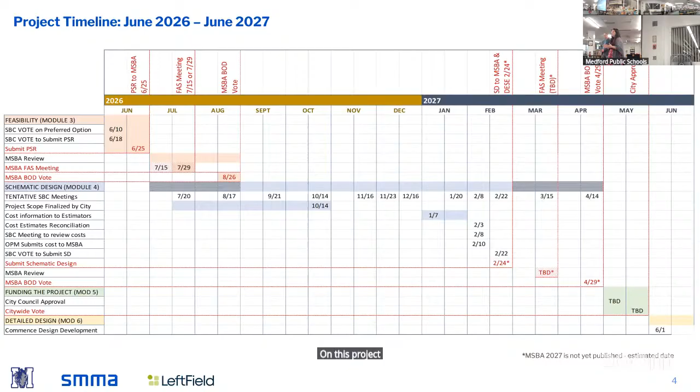So we submit SD in February 2027. From there, there's another MSBA Board of Directors approval in April, end of April 2027, and that will approve the project scope and budget. We will know at that point what the MSBA's grant is officially on this project and what their participation will be versus the district share.

Moving from there, in May of 2027, that is when we are targeting the local approvals for the project. Once the project is approved locally through a vote, we move into design development, and from there, I think it depends on what option is selected for the timeline of when a school would open.

So that's enough information probably on schedule for now, and we'll hand it back to Matt to talk more about the exciting stuff.

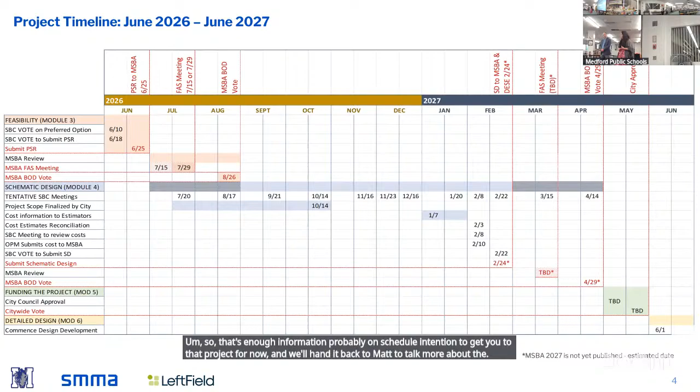I think it's all exciting. The schedule is exciting. Deed restriction is exciting as well. So we did talk at the last community meeting about the deed restriction. This was the agreement back in 1967 between DCR and the city of Medford.

When the existing high school building was built, a section of Edgerly Field as well as the football practice field had a deed restriction placed on it, saying that the only things that can be developed there are either for recreational uses or for access roads to feed those recreational uses. So that was something that came to light.

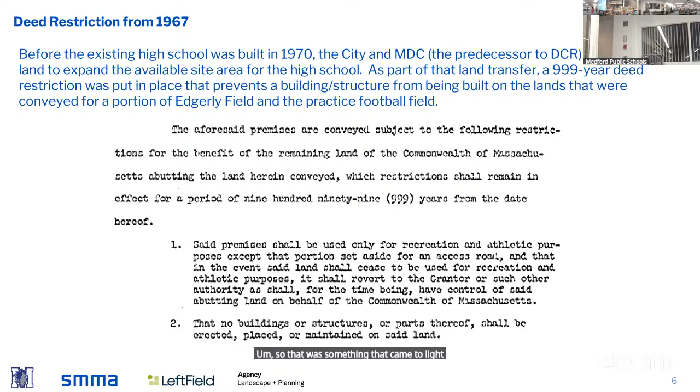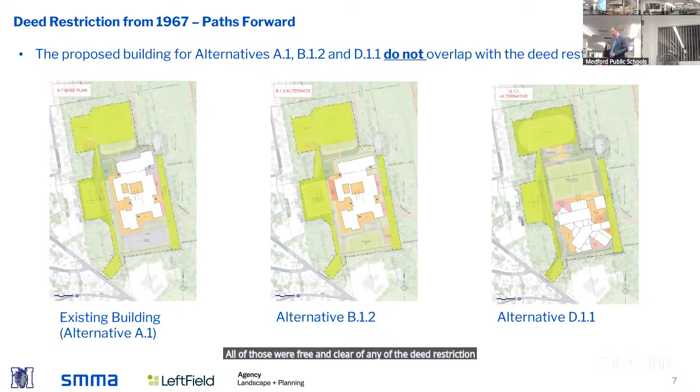The three alternatives you see here are the A.1 code upgrade option, the B.1.2 addition renovation option which keeps the majority of the existing building, and the D1.1 option, which is new construction primarily on the southern parking lot with a little on the existing building. All of those were free and clear of any deed restriction areas, so we can proceed with considering those as we initially had.

Alternatives C2.2, 3.4, and D2.1 all had some amount of their building massing overlapping on that deed restricted area. What we've done moving forward, and what the building committee voted to approve, was revising C2.2 and 3.4 to avoid the deed restricted area, keeping the spirit and design intent of each, but shifting around the volumes you'll see in a moment.

D2.1, there was no way to conceive of that option outside the deed restriction, because that option was building on Edgerly Field, and since the majority of Edgerly Field had the deed restriction, it sort of negated it. That was voted on at the last, or maybe two building committee meetings ago. There was a decision to move forward with C2.2A and C3.4A, which are the evolutions of those two, and to remove D2.1 from consideration.

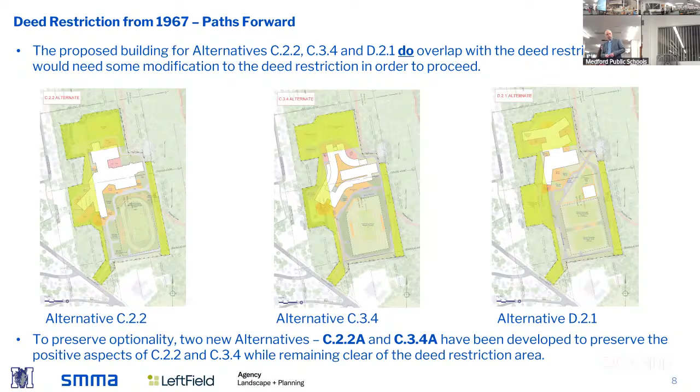I think it just takes a little while to come up. Nope, it didn't. So this is just a quick explanation.

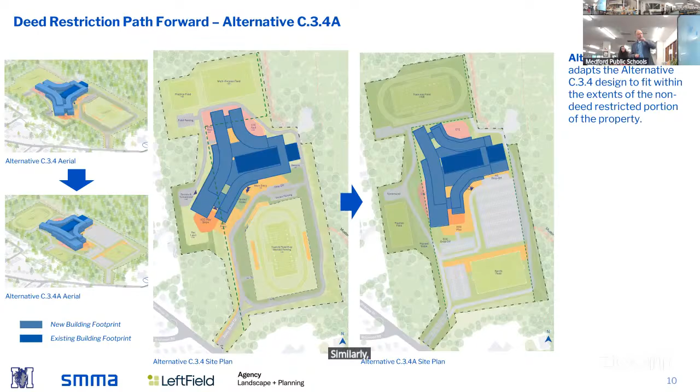There's a three-dimensional view here as well, showing that progression from an aerial overhead view from C2.2 to C2.2A. Similarly, C3.4 evolving to C3.4A. Again, you can see the deed restriction line coming through, and you can see how the intent of the building and the genesis behind the massing remains intact.

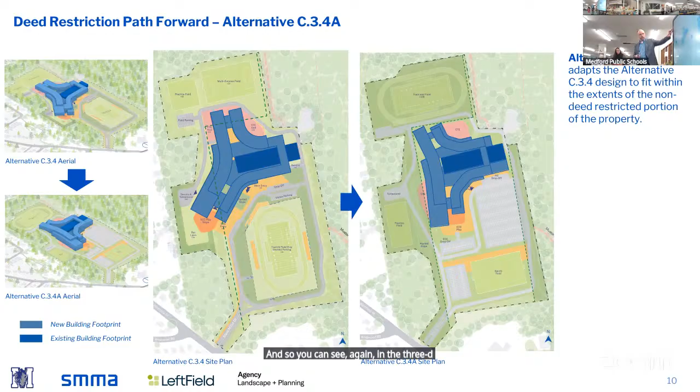Both of these options preserve the existing gymnasium as well as the existing pool, renovating those and building around them in different ways. You can see again in the three-dimensional view how we're evolving the massing going forward, and we'll get into some more detail there. So that was the deed restriction input into our design process.

The other input into the design process has actually come from the MSBA. In the feasibility study hierarchy, we complete the preliminary design program, which is a PDP phase report. We submitted that to the MSBA, they reviewed it, and got back to us with some comments.

One of their comments was that they wanted to see a high school-only option developed for one particular design. They didn't say we need to do it for all the designs—they just wanted it run out as an example, to understand the cost implications of not doing anything in this building besides high school grade 9 to 12 program elements.

There's a lot of other things here at the high school. There are some things being considered to be brought here, but as an evaluation point, the MSBA asked us to do this. We did have conversations with them about why they were asking for this particular topic, and I think Jenny explained it at the building committee meeting we had on Monday of this week—that it wasn't that they were telling Medford we cannot have any of these other non-high school programs in the building.

What they want to do is make sure it's absolutely clear as to the cost of those non-high-school related programs. So by taking all of them out, we're going to look at the costs, but we're also drawing floor plans and looking at massing so we can see the various implications of pulling those pieces out of the building. We've added that in as another alternative for consideration.

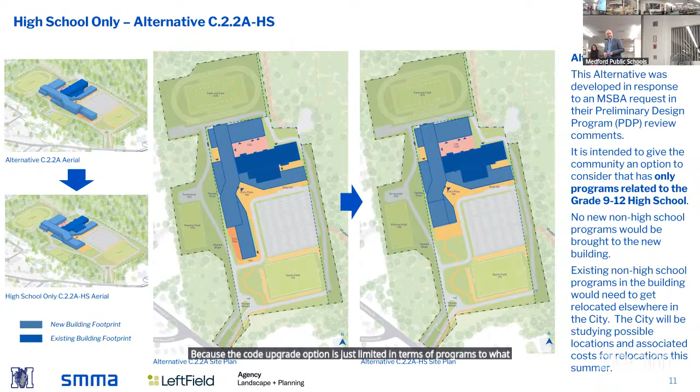So that's how we got to where we are today. I'm now just going to run through the 6 different options so you can see on a level playing field where they are, and then I'm happy to take some questions afterwards. I saw a question back there, but I think if I run through some of this I may answer some questions. It's good to have the full suite of information before we dive in.

So graphically, comparatively, all 6 alternatives currently under consideration are shown here. So again, code upgrade, our addition renovation that preserves the majority of the building, builds vertically from it and replaces the A wing. C 2.2A now, and C 2.2A high school only, keeping the gymnasium, renovating the pool. What's depicted also in C 2.2A is the renovation of the fitness center, the gymnastics gym, and some of those high-bay spaces that are larger from an alternative PE perspective.

That's shown here. I wouldn't say that's necessarily off the table right now for C 3.4A, but it's not shown graphically—that's why the dark blue is slightly different here than in that particular option. And then lastly, we have D 1.1, which is our all-new-construction option that's still preserved.

The costs for these were also presented at some recent building committee meetings. What's outlined here is the variety of costs for, again, 6 options. It's slightly different in terms of what's running across the top, and I'll try to explain why. There are familiar numbers as you go across the top though, in terms of A.1, the code upgrade option, B.1.2, C 2.2A, 3.4A, D.1, and then there's a D.1 NP at the end.

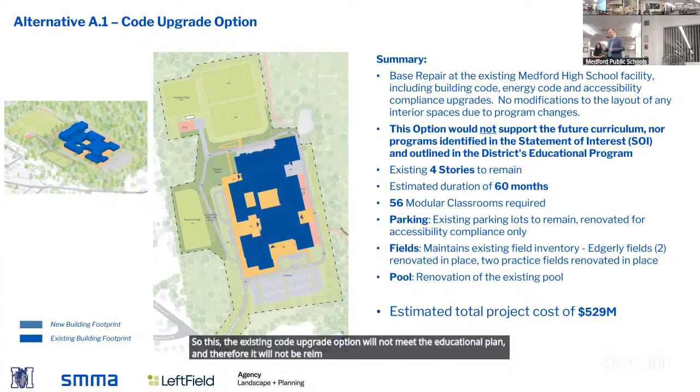So the existing code upgrade option will not meet the educational plan, and therefore it will not be reimbursable at all from the state. We don't have too much information on the code upgrade option - we tend to try not to show existing school plans in public meetings, even though there's been a request previously, just from a safety perspective.

But we did want to give a sense of how this is phased, so people can understand the amount of time these options take and how we'd work through renovating, since we do need to study it. In the first year, starting potentially next summer, we may be doing early work on the site to enable construction of the project. That may include things like drilling geothermal wells, putting in some utilities, and if there are temporary modulars, we'll work on those.

The next year, summer 2028, is when construction would begin in earnest, and we would start towards the northern end of the building.

That includes renovation of the gymnasium, the pool, as well as the C wing. We're starting up here because the central mechanical room for the building is right up there, so we need to replace that and then work our way and feed that into the rest of the building as we move to the south.

The second phase would involve the vocational wings, and the third phase would involve the central B wing as well as the auditorium, the A wing. Where we see this M number here, these are modular classrooms that would have to be brought to the site and used as temporary instructional environments during the course of those phases.

There are 56 of them, primarily because when we take down the C wing or the B wing, that's about how many classrooms we have to replicate for either of those phases. So that's where that number comes from. This shows how we move from the existing building to a fully renovated version of this building, basically fixing what's here today.

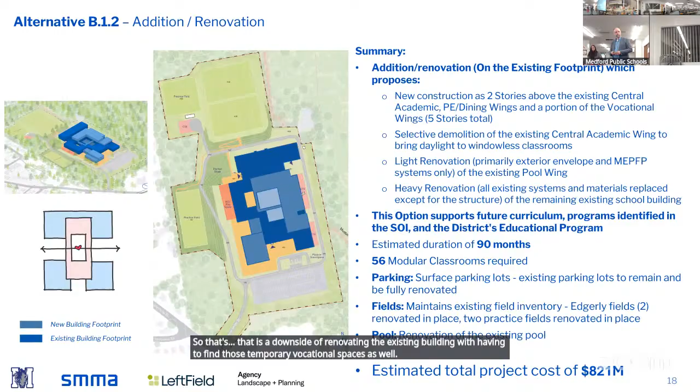We do have floor plans of the existing options. I'm not going to go through all the detail of these, because I have done it before. If people have questions, I am more than happy to circle back to them, because there is a lot of thought and time that's been put into organizing these plans so that each one would be a wonderful school environment at the end of the day. We don't want to show anything to the community that we wouldn't be happy with as a design product.

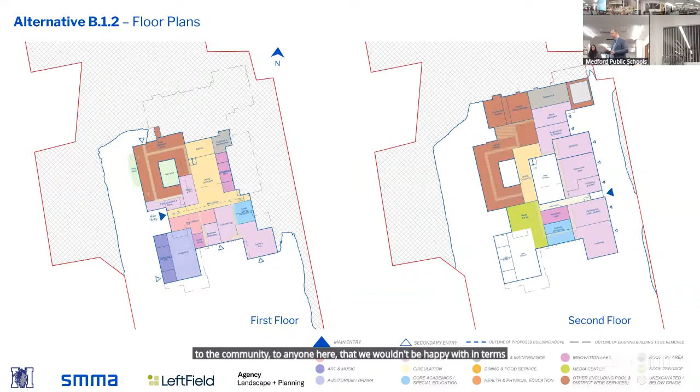They've all been thought through in terms of programmatic adjacencies that we heard when meeting with the educators, trying to understand what the building is about, but also trying to create a logical, connective set of spaces so it feels like a more connected community when high school students enter, and when all the other program elements at the high school are brought to this building or reconfigured within it.

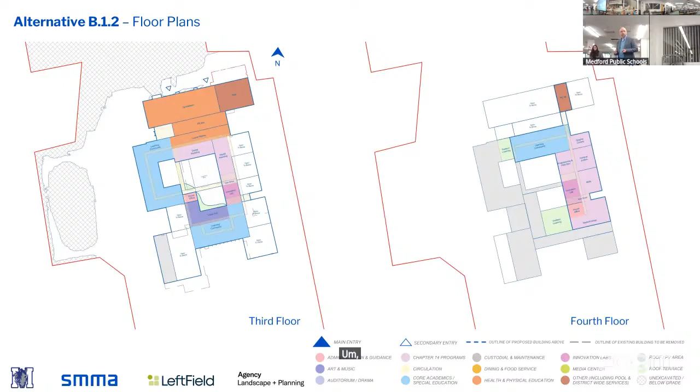So again, 5 floors here with this existing building, with the 2 added stories going above the primarily 3-story building that we have today. An aerial image showing some of those programmatic relationships.

Second aerial. I'll point out, as we're looking at both the building and the rest of the site context — and I may steal all of Laura's thunder and not let her get a word in edgewise, but stop me if I'm missing something.

I did want to point out that for all the previous options, we were showing a field located over a parking garage as our primary concept. As we shifted from our initial preliminary feasibility study phase to this phase, we really shifted the thinking so that our baseline assumption is all surface parking and surface fields, no elevated field above a parking area. We do still have numbers for that alternative, and I'll show you the numbers in a minute for each option.

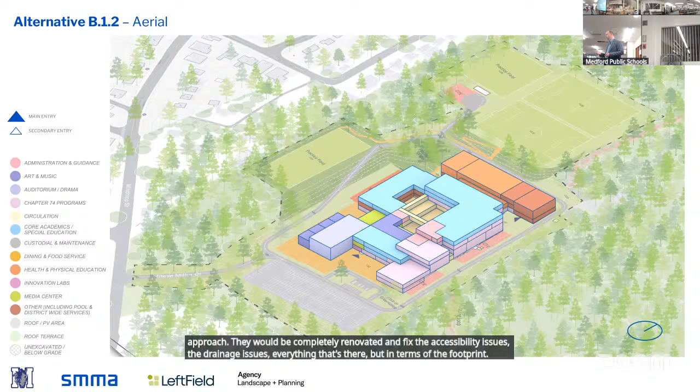But what you'll see right now, for instance in B1.2, and also in A.1, basically recreates the existing parking areas on site as the parking approach. They would be completely renovated — we'd fix the accessibility issues, the drainage issues, everything that's there. But in terms of the footprint, it's going to look very much like it does today, and that means the field inventory will also look much like it is today: renovated versions of the football practice field, Edgerly fields, and the practice field adjacent to Edgerly fields.

Do you want to talk about this one, Mark? I think it's great. Does it cover the site circulation?

Sure. One of the main differences is all the options will have 360-degree access around the building. We heard from so many people that circulation is kind of a nightmare at times, and we heard from first responders that this is a concern of theirs. So there will be different roads and loops for buses, car drop-off, and of course emergency egress. It's a little more difficult to change the grade with the majority of the existing buildings staying as is, but we found a way to make that connection happen on the other side of the school.

I'll also make a plug for the field-over-parking option, which would basically give a whole other field on site, and all the parking would be less visible and underneath. It does add to cost.

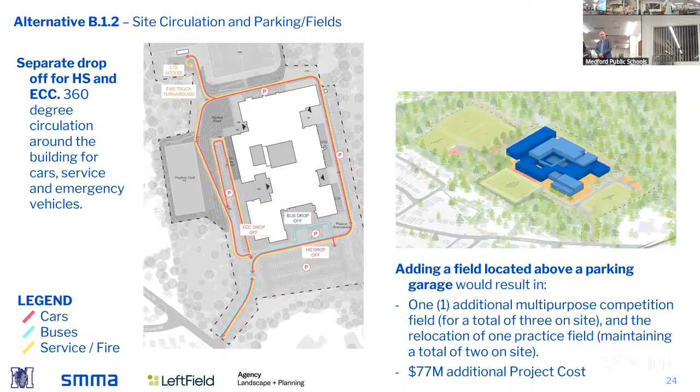I won't take too much time on the phasing diagram for this, because the concept is exactly the same as the A.1 option. Really, the only difference is in the duration of the phases, particularly when we're building new construction above existing buildings. It slows down the process compared to just renovating the inside of the building, because you can just start there and go through. We have to make sure the rest of the building, where students are learning and teachers are teaching adjacent to that construction area, stays safe. That priority on safety, and the nuance of having to build through, matters. This is built on top of the steel frame portions of the building, which is more viable than trying to build on top of the concrete frame portion. So it's still a best case scenario, but it's lengthy, and the time is increased considerably from the A.1 option because of that.

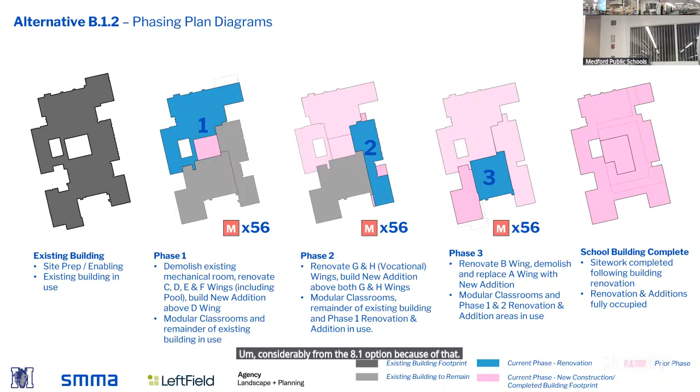All right, our C2.2A option — this is again the revision to the C2.2 option based on the deed restriction response. The total height of this building is 6 stories. That first story is really just a portion of the lowest, most southern extreme wing of the building, where the early education center would be located. So the portion of the building that high school students experience is primarily a 5-story building, but to keep everything on a level playing field, there are 6 floors, so we're saying 6 stories.

Just some items of note here. Again, the modular classrooms were removed from all the rest of the options in terms of consideration. We heard the feedback during the initial feasibility study phase that they were not desirable. So we've essentially come up with phasing options that avoid the use of the modular classrooms. As we did additional study on the phasing approach, you'll see that the time frame for this overall did increase considerably as well.

And that's really because we have considerable pieces of the building, square footages, areas of the building, in each particular phase. So there's only a certain amount of building you can build in a certain amount of time. So we have to layer those different phases on top of each other.

The C 2.2 option was a little bit shorter in terms of how it could actually be put together. That's because it flared off in this direction, and because the building flared off that way, we could avoid building on top of the C wing and basically build almost the entirety of the new addition in one phase. That greatly reduced the amount of time by removing a phase.

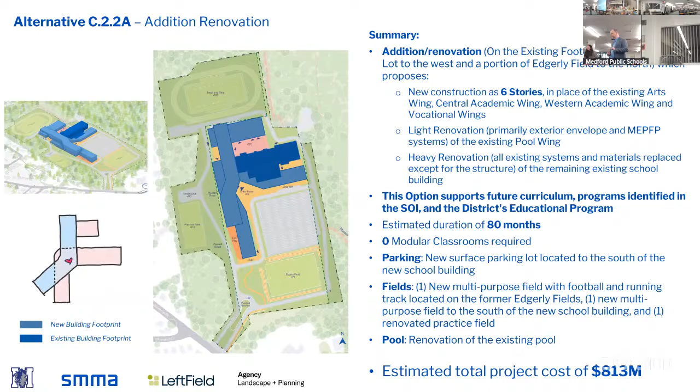All right, floor plans of C 2.2A. Again, I'll point out that first floor I was talking about is just that small piece on the first floor for the early education center. It has a separate entry from the high school, so that we're not commingling where little students are entering the building with where high school students are entering.

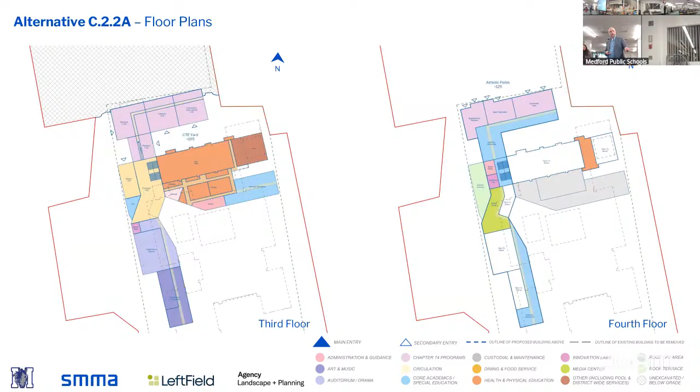We move up. Again, the third floor here is sort of the primary continuous floor all the way through the high school building, and will feel like a completely high school environment. And then we have the fourth floor, fifth floor, and sixth floor above this.

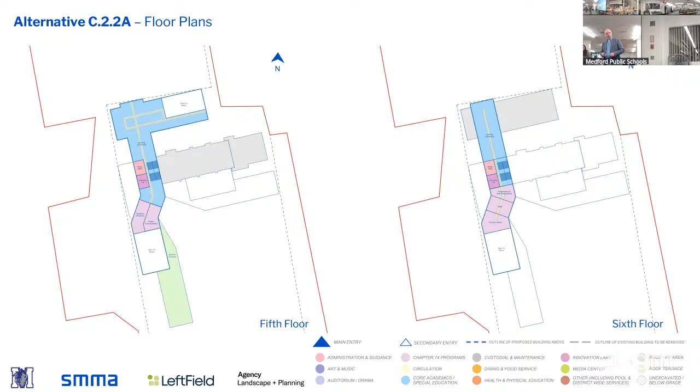The aerial view shows the site components surrounding the building. We're able to fit in both a running track and a football field up at the top where Edgerly Field rests right now. Whether we can have bleachers beyond what's out there now for the soccer and lacrosse fields is something we'll need to discuss with the land counsel to understand what the deed restriction allows. But there is the ability to fit that type of resource on the site where Edgerly is right now.

This would also include the renovation of the football practice field, which could eventually not be football practice once we have a full football field. And then one multi-purpose field as well down towards the southern end of the site, more or less on top of the existing parking lot now.

I would give it, the athletic field is kind of a very last part. So the question is, intuitively, it seems like fields would be the last piece of a construction project going through. I think that's an accurate read in terms of how the site would get developed.

Certainly, if it's a natural grass field, you want some ability for it to sit and rest before it's used. We may have more flexibility with a synthetic turf field in terms of how quickly it can be used and against what it can be used. But I think those are all considerations to be discussed with the construction manager, looking at the city's needs and the district's needs in conjunction, to understand what's viable and what's the preferred path forward.

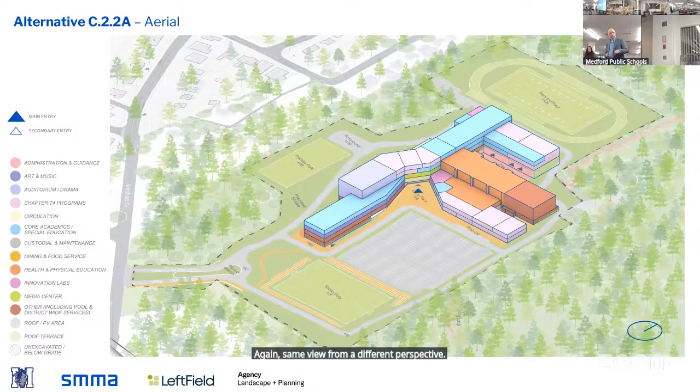Again, same view from a different perspective. The image on the right-hand side is our parking garage with fields on top. In essence, each one of these will add one additional multi-purpose soccer/lacrosse field to the overall field inventory. It slides the parking underneath and raises that one field that was at grade up into a raised, above-parking elevation, if you want to think about it that way.

And as Laura mentioned, all these options now show 360-degree access for first responders, as well as alleviating some challenges of traffic circulating around the site. This option is also starting to explore an improvement to Steve Miller Drive, to alleviate congestion for traffic coming in and out, but also providing amenities for first responders to better address and serve the site. It doesn't create a secondary emergency access anywhere, but it's trying to work with the land we have to create the best scenario possible as we move forward.

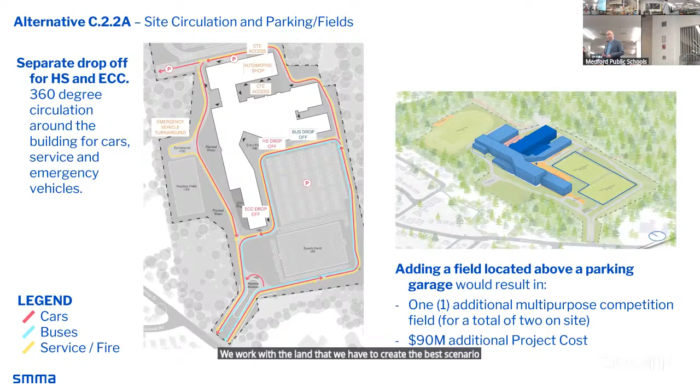The phasing for C 2.2A starts to get into what I was alluding to earlier. This first phase of the building is the one that could be open somewhere between a year and two after we get into the summer of 2028.

Up through here, so renovation of the gym, the pool, new addition. The second phase is where it gets complicated, because we actually have to tear down the C wing and part of the H wing as well to be able to get that to work as it stretches down. The third phase really involves the removal of the existing building that remains, and then the site work is completed after the fact — the fields we were just talking about, parking, that type of thing.

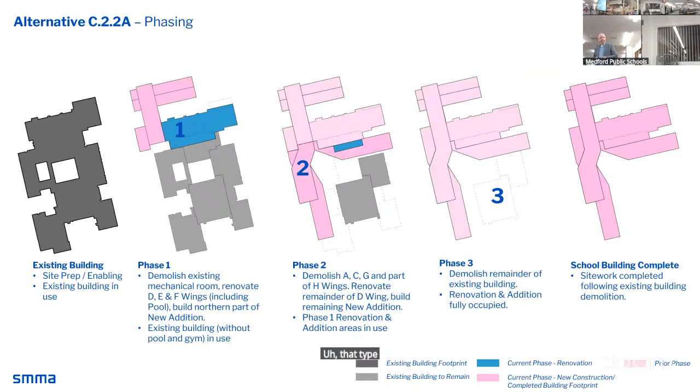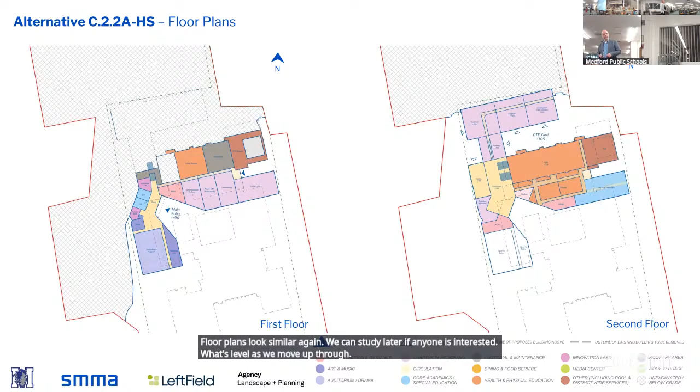Floor plans look similar again. We can study later if anyone is interested what's at each level as we move up through. This will result in a 5-story building though, because we are getting rid of that southern portion, that's where the lowest level was. So even though the building itself is relatively the same on the inside, technically it does change from a 6-story building to a 5-story building.

This is a 3-dimensional view of it from the other direction. And then site circulation, which again is going to look very similar. Part of the reason why we also targeted this area is that we want to think about future expansion as well. We have to plan for the building from an MSBA perspective, but also if down the road those programs that were removed or moved from the high school want to come back, this will be a good location opportunity to fulfill and add that programmatic space on. Same concept in terms of the field over the garage space or over the parking area, same relative cost in terms of this high school only option.

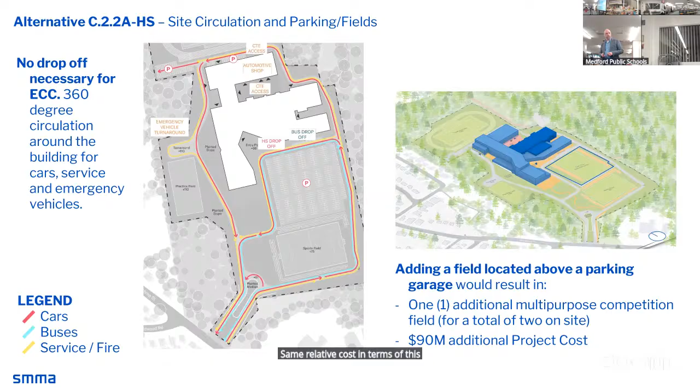In the phasing, this is the same phasing. This is actually the C2.2A graphics that you see here, but you can imagine if we just take away that section towards the bottom, the phasing concept is going to be exactly the same.

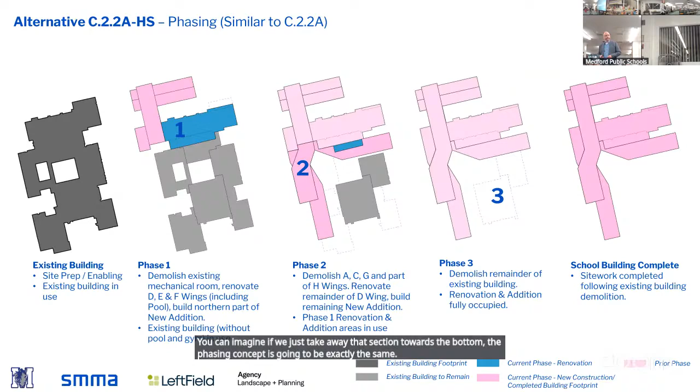C3.4A, so this is our second addition renovation that focuses on saving the gym as well as the pool space. Very similar, I would say overall to C2.2A. Obviously the geometry is different, the way that we're wrapping around the entirety of the existing field house is slightly different. But in terms of what's yielded at the end of the day, because the building is in a similar spot, this is still having consideration for a track and field up on Edgerly Field, renovation of a practice field, as well as one relocated multi-purpose soccer and lacrosse type field.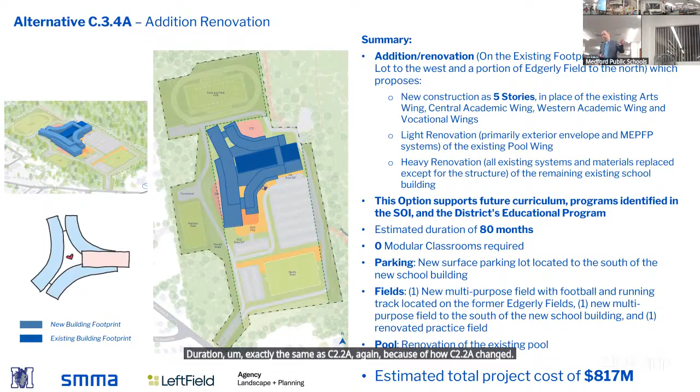Duration, exactly the same as C2.2A, again, because of how C2.2A changed to sort of match and align with the phasing approach to this one. We have our floor plans moving up. This is a 5-story building in its initial configuration as it's represented here. 3-dimensional image of it.

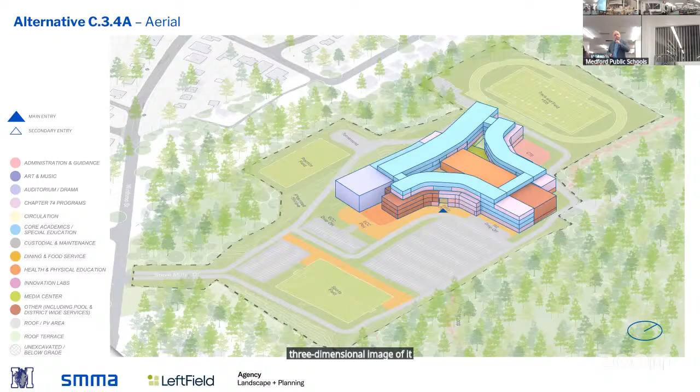And then site circulation, again, very similar in terms of how it navigates. The last time we looked at this, there was a question about whether or not there was this connecting circulation drive that runs through. It was something that was able to be realized in terms of a grading approach to get traffic to circulate through, and so this will provide a shortcut rather than everyone having to circulate around the entirety of the building and back down, which we understand was challenging. This allows for bus traffic, MBTA buses pulling in, drop off at the front of the high school, and then pull back out, so it streamlines that approach.

Our phasing concept here is similar, we're going to be building towards the northern end of the building. This also, just as we go all the way back to the code upgrade option, we want to replace the central heating plant and cooling plant for the building in that first phase, and that's partly why we're building here. But it means that the pool and the gym and then all these associated spaces are the first ones to come online. We then get to demolish the remainder of the building and build the second portion of the addition.

This is something I didn't explain earlier but is worth noting. The reason why we don't have any modular classrooms in this particular option is because everything that we would be demolishing in the second phase, we're going to be building space for up here. So we're essentially creating permanent modular buildings by creating that first phase of construction.

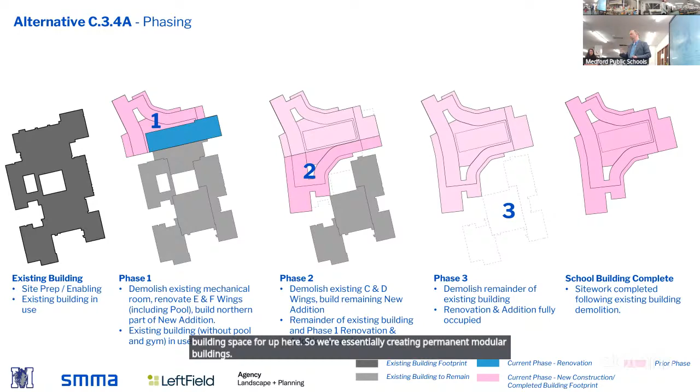And then lastly, we have our D1.1 new construction option, again, to the southern side of the site. We are showing the site configuration here with the surface parking lot adjacent to a multi-purpose field and then track and field up at the top.

I think certainly if people were interested in not having a track and field up at Edgerly, we could still renovate the fields that are up there right now. So you could have two more multi-purpose fields and a practice field up there if that was preferable for whatever reason, that would increase your field inventory on site. This is sort of swapping it out for a different type of resource, but I think one that we've heard is desirable from the overall site perspective, having this type of resource here in terms of allowing athletes not to have to cross the city to Hormel Stadium for that type of competitive environment.

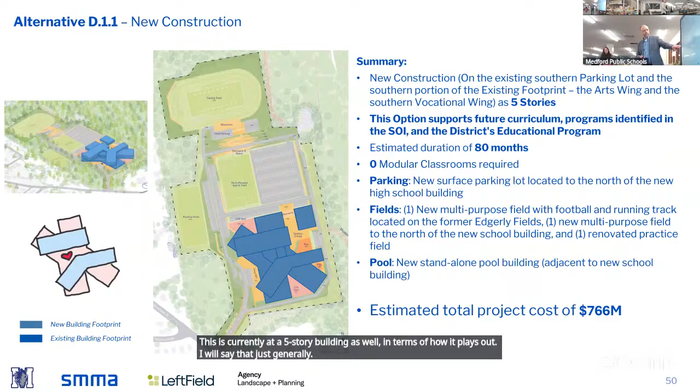Our floor plans moving up through the building. This is currently at a 5-story building as well in terms of how it plays out. Generally, the first floor has a lot of the CTE programs that have access or desire for direct connection to the exterior. Auto technology is one we can't put up in the air. There are other programs that want first floor access too. But the primary high school environment, with the cafeteria and gymnasium, will be up on the 3rd floor. So students would come in and essentially move up to that primary environment, not too dissimilar from the C2.2A or C3.4A options, in terms of how the site works here.

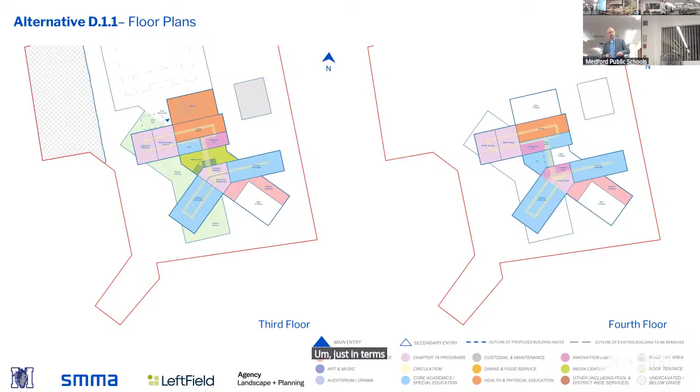The massing on the site, as we talked about before, is responsive to the Steve Miller Drive entry sequence coming in, so it feels like a welcoming environment. We do walk this line with this particular option of being very close to the front of the site, so the building will be very present and visible off of Winthrop Street, versus moving back into the rest of the site. But we also want to make sure this doesn't create a traffic bottleneck right at the entry as we're coming in, so we have to balance site circulation and building massing.

Our other three-dimensional view.

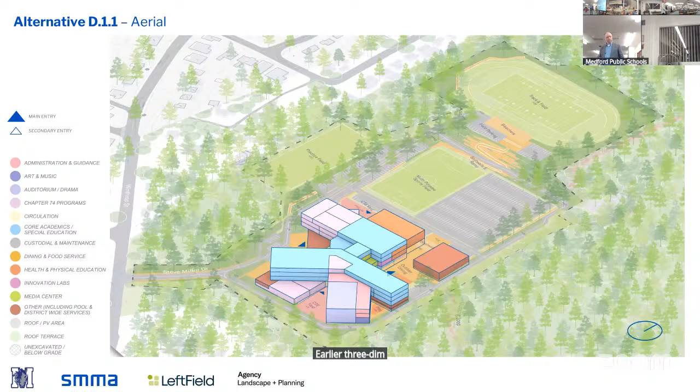So the question again is regarding Edgerly Field in this particular option, whether there's any higher potential for Edgerly Field to come offline immediately, and then the other field, so that it could be used for parking potentially, given the fact that we'll be building on top of the parking lot in the first phase with this option.

It's definitely a possibility. I don't know if it's any higher possibility or probability than any of the others. I'll default back to saying we need to have the CM on board, and then we need to engage in a conversation with the district and the city to understand the priorities. Because we could determine it's more important to have a field on site, and then create parking off site with remote shuttling or something back and forth. We can change parking policies so people can't drive. There's a whole bunch of different options and levers we can push, but we haven't had those conversations yet to know where the priorities are and where we'd end up.

We really do want to have the construction manager on board before we dive into that, because we want their perspective. They're eventually going to be the ones that have to manage the timeline, the schedule, and the cost, and work to whatever expectations and obligations we lay out for them in terms of the site development and the fields.

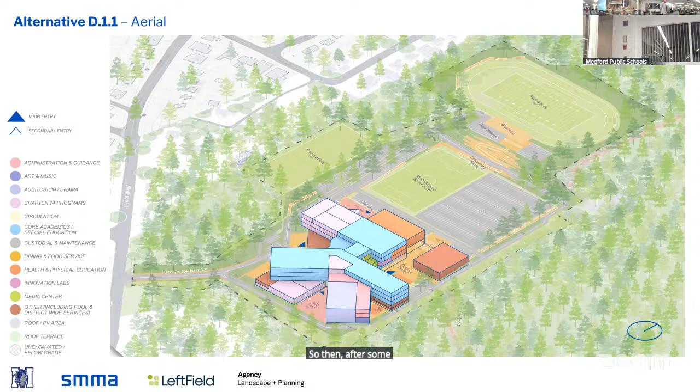So that new construction, you would assume happens while this building is still in use. Then after some time, that building comes online and you start to demo this. That's correct. So the question is, are we envisioning the southern portion of the building being built while the rest of the school is active, with teaching and learning going on? The answer is yes. But it's also going to be yes for any of the other options we're looking at. That's just the reality of deciding to rebuild on this particular site.

Somehow we have to get to a new building, whether it's renovating what's here or building new additions or new construction, while teaching and learning continues. So it will make on-site circulation challenging in terms of how things get modified. We may lose parking, we may lose fields as part of the process until we're all the way done. But it's also going to be a big part of the construction manager's responsibility to make sure site circulation is done in a safe and responsible way, so no one is put in any danger going through this. That is the paramount consideration when building on an occupied site.

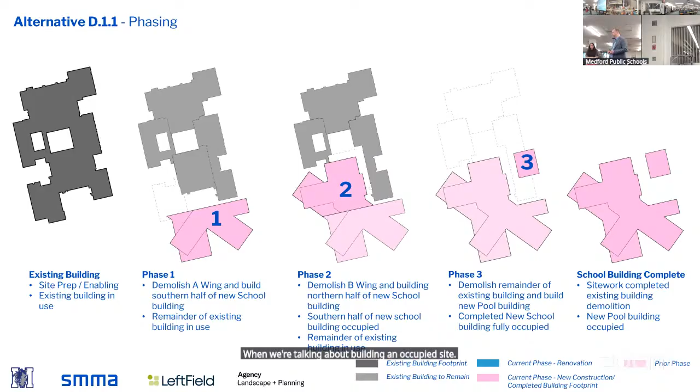All right, so I guess that was technically okay to ask questions because we're sort of at the end anyway.

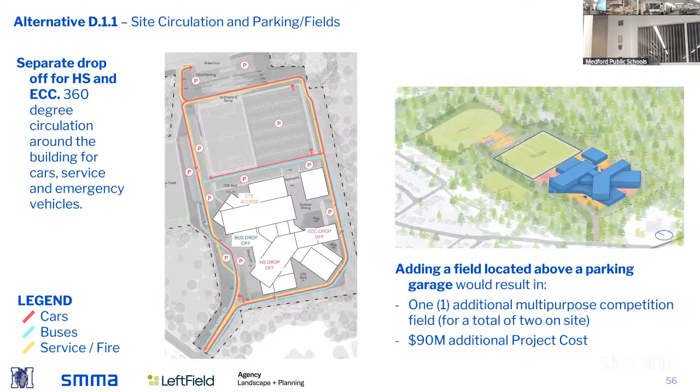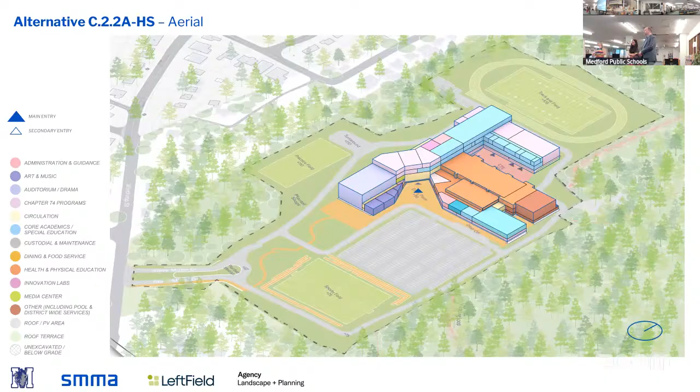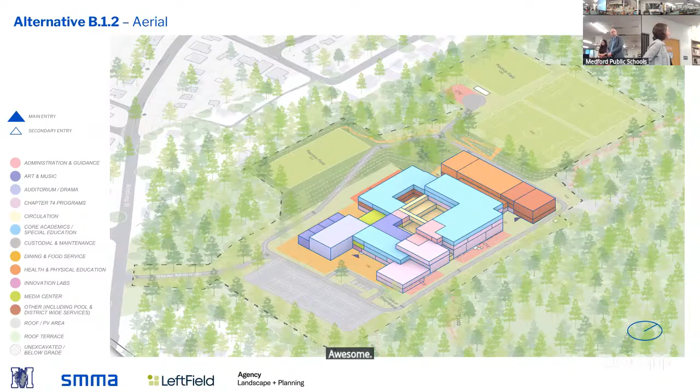Right, yeah, yeah. So I'm going to try to repeat those questions, and you're taxing my memory, so I'm going to try to go all the way back. No, it's fine, it's my issue.

The question was about the removal of the modulars and the cost impact on the project. It was stated that when we take the modulars away, there is a cost reduction because we don't have to pay for them, and that is a true statement. That reality was accounted for in the updated numbers you see here. It's really more impactful than just taking away the modulars, because the modular construction is not reimbursable at all, and it's also categorically ineligible from the MSBA. So that cost, which would be coming fully to Medford, no longer has to be incurred.

The other piece about the modulars is that when we take them away, we basically have to introduce phasing, or extend phasing from what we previously had. So the additional time required, with the construction manager having their staff on site for an additional year or two in some cases, is also accounted for in these numbers in terms of the extended schedule associated with removing them.

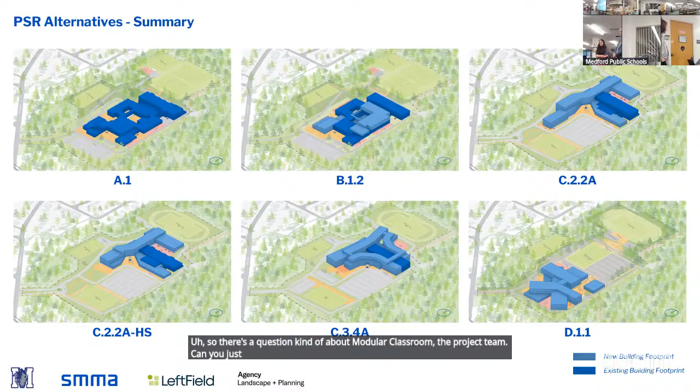So there's a question about the modular classroom project. Can you talk about an experience you've had building a project where there's been that phasing process going on, and how that may have affected education delivery?

Sure. Adjacent to us in Somerville, at Somerville High School, which was even more land poor in terms of the high school project, there were modular classrooms — one bank of about 12 on site. We used that as a shell game location to move teachers and students out into the modular classrooms and then back into areas of the completed building. The timeline got a little complicated because COVID hit right in the middle of the project, but the modular classrooms were used for multiple phases as construction went through.

In terms of impact on education, primarily students were moving, since they were the ones out there — teachers were either out there or not. Students were moving from the existing building to the modular classroom building, sometimes around a construction site to get to another portion of the existing building or a new building and back in. So there was exposure to weather.

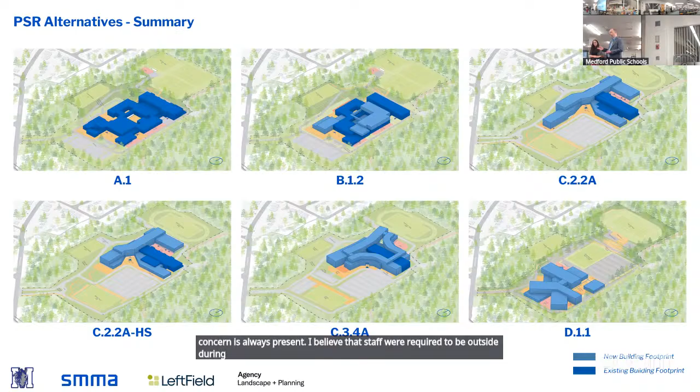There was a little bit of additional time to get outside to move through, but the modular classroom building was placed in pretty close proximity to the existing building. So we try to minimize that and make sure that safety concern is always present. I believe staff were required to be outside during class changes to make sure students weren't walking off in different directions instead of going to different classes. So that was part of the consideration as well.

And then we've got another question, specifically about option D. Can you talk about the impact on athletic facilities and why they'd be smaller in D as opposed to the C options, relative to the gym and things like that?

Sure, so the reason the D option's athletic facilities, the gymnasium, as well as alternative PE spaces like a gymnastics gym or fitness room, would be smaller is because when we have the larger spaces, we're allowed to renovate them through the MSBA program. It's just part of the reality of being in a building with those larger spaces. As part of new construction, they cap the size of the gymnasium we can build as new.

It's not a scenario where we can build larger if Medford is willing to spend their own money to build something bigger. There's actually a hard cap that says if you go over 18,000 square feet on a new construction gymnasium, the MSBA will not participate in your project at all. So it's a hard cap, and that's part of the reason that particular facility would be smaller.

And then for the fitness room and gymnastics gym, if we're building those new versus renovating them, it's a much more challenging thing to get those accepted as larger spaces. Some of that would have to be understood through negotiation discussions back and forth during subsequent submissions of reports to the MSBA, but in a lot of cases those end up needing to be smaller as well.

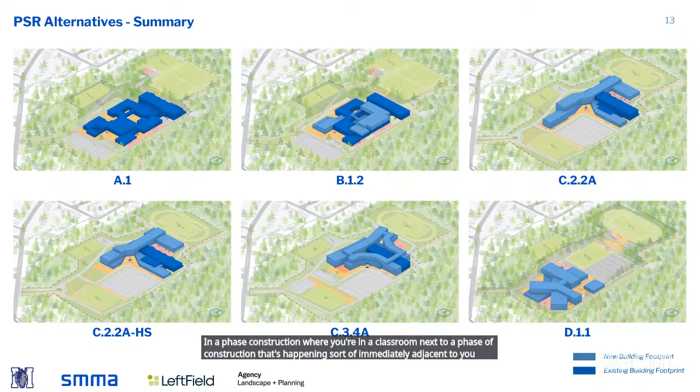Hi everyone, thank you for all this information, it's a lot. My question was actually the one he just asked about the modular classrooms, but the opposite - I'm excited to see less modular classrooms, but I'm curious what the project team's experience is with learning in schools that have gone through phased construction, where you're in a classroom next to a phase of construction happening immediately adjacent to you. Is that better? How has that gone?

I don't know if I'd use the term 'better' necessarily - it's a reality of the process we go through. The things we have to account for are air quality, and there's continuous air quality monitoring done by the construction manager and/or a third-party testing agency during construction, to make sure that wherever dust management barriers are set up, they're doing their job and nothing is permeating through into the rest of the occupied school.

Acoustics is another thing we pay a lot of attention to, making sure that whatever temporary partitions we build, if separating occupied space from space under construction, are designed with acoustics in mind. We don't just put up a single layer of drywall or plywood and expect that to control everything. It's not that we can completely isolate occupied sections from construction, but we need to manage it from an acoustic perspective.

And then we potentially need to work around certain days, like MCAS testing days for instance, which are usually quiet days when certain construction activities will be limited. So there are challenges all the way through, but they're manageable. There has to be a clear line of communication between the construction team, the district, and the school to make sure operations are smooth.

If I could add to that, I think that's one of the benefits of bringing a construction manager on during this design phase, so they can work directly with the district and the school, even before project approval happens, to talk through some of those issues and concerns that would come up on a project happening inside an occupied building.

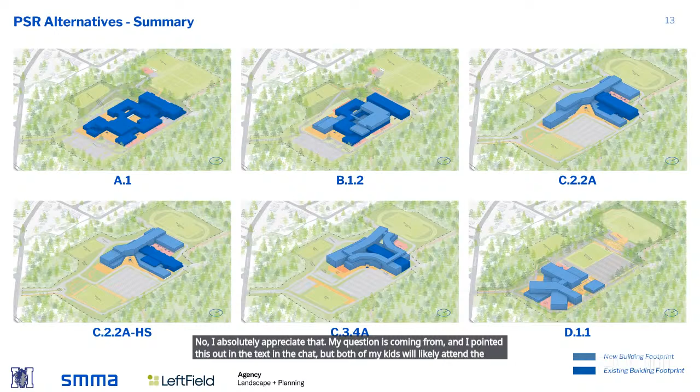No, I absolutely appreciate that. My question is coming from—and I pointed this out in the chat—both of my kids will likely attend the school during construction. I'm just thinking about learning calculus with steel being erected next to me, right? It's a reality, I get it, it has to happen. But I think it's helping me decide between an alteration, renovation, and a new construction option. Does new construction pull those activities apart so that those 80 months of construction are better for the students in the school for those 80 months?

And then just one more comment since I got unmuted. I pointed out in the chat that I'd encourage the building committee to ask for a very simple massing rendering of the building options from Winthrop Street. I think we all acknowledge that getting this project passed is going to require significant community buy-in, and there's an opportunity here to show how it's going to impact Winthrop Street, what it's going to look like, how it's going to feel, when we're thinking about going between the D1 option and any of the others that maintain at-grade facilities at the front of the site. I know D is taller and closer to the road, right above the street. So I'd advocate for the building committee to ask for that in the next week—it's probably something that can be done pretty quickly by super talented 3D modeling teams. But I think it's really important to think about people who aren't going to have kids in this school and how this impacts them.

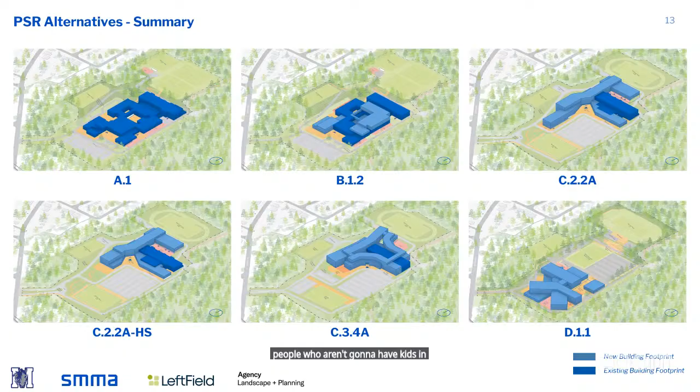I don't think we have to wait for the building committee because you just made the ask, Kara. So the team heard you. Yeah, I think that's something we can share with the building committee, either before or at the June 10th meeting—just part of the visual that's wrapped in here.

I had a question that is maybe best answered by Dr. Galusi, that a resident sent to me and asked that we answer. There are some questions around the need and intended usage of particular spaces. For example, one is about some of the variants we're considering for the auditorium. For those following along, we have options right now for 750, 500, 800, and 1,000 seats. So can you talk a little about where we started, how these options came to be, and the vision for that space?

Absolutely, absolutely—so people at home can hear.

Right now, I think it's important to know our auditorium holds roughly 330 seats. However, many of them are broken, so in reality it's closer to probably 300 seats. And there are about 1,200 students in this building.

We have a thriving arts program and theater program growing every year, but the principal has very limited space to gather grade levels of students. So for a school assembly, grade level assemblies, anything instructional, or speaker series, it's really just the gymnasium. For some events that might be appropriate, but for speaker series or projection opportunities, it gets very cumbersome and challenging.

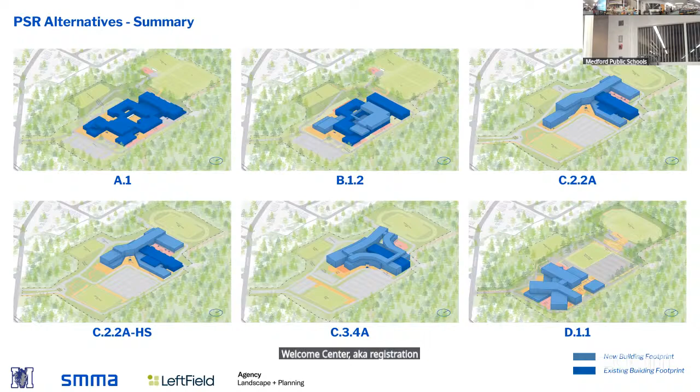Welcome Center, AKA registration, AKA Parent Information Center. It has lots of names. But as you know, when you enter the lobby here at Medford High School, that is our registration office. We like to refer to it as a welcome center, so that's why we think about how we want families to feel when they come here.

We've created a little hub around our welcome center so that when families come in, they can have all of their questions answered. They have adjacent supports as needed. For example, behind this wall is our EL department. Many of our students that come to Medford registered here also require some additional supports. They may require some language testing so that we can determine the appropriate supports and assignments. We also have special education located right next to our welcome center. We have nursing, as you know, medical needs are part of the registration process. We have transportation right here, and we have MFN also right here. So all around our welcome center are all of the adjacencies needed to support families, get their questions answered, help with any sort of assessments, assignments, and wraparound services.

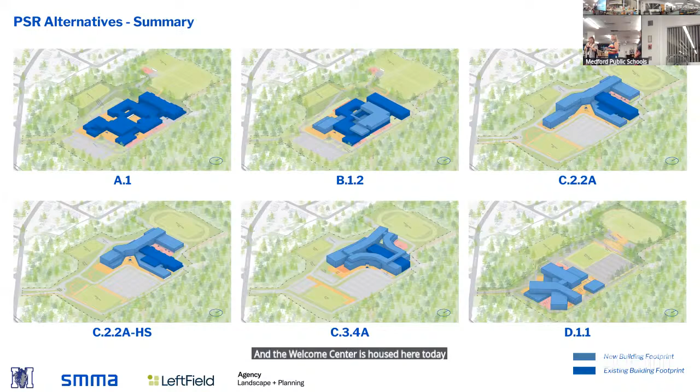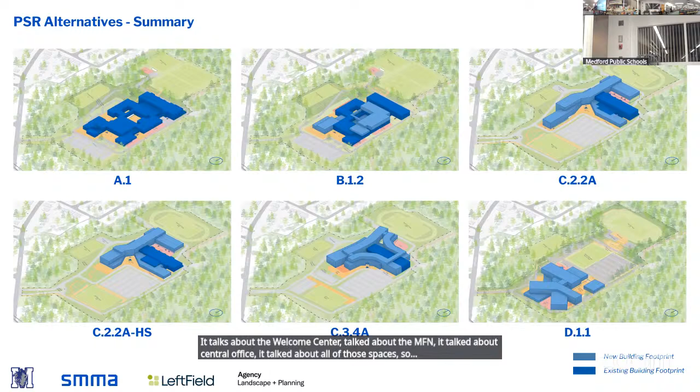Okay, and the Welcome Center is housed here today. Yes, and if we go all the way back to the beginning, in 2022, when we submitted our first statement of interest for this iteration that was ultimately successful, we always endeavored to rehome all of the programming that was in this building. So that was part of our statement of interest. It talked about the Welcome Center, the MFN, central office, all of those spaces. So it was always the school committee's intention and plan to continue to house those spaces. The plan always has been that they would be here because they've always been here.

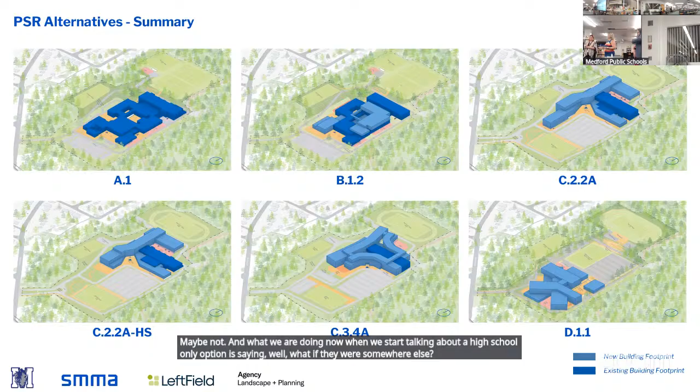Now, is that the right reason to have them here? Maybe not. And what we are doing now when we start talking about a high school only option is saying, well, what if they were somewhere else? Does that improve the quality of programming? Does it improve accessibility? Does it save costs? There's a lot of things to explore there, but over the course of three full school committees now, the school committee has been steadfast in the value of these programs and the things happening in this building. The pre-K programming was always here for many years and was moved out, and there's a great debate for us to have at some point about whether centralized or decentralized programming is beneficial for pre-K students. We'll have that debate in the near future. But the school committee, as the holder of the application process and the council through its affirmation, has always said these programs are important to Medford.

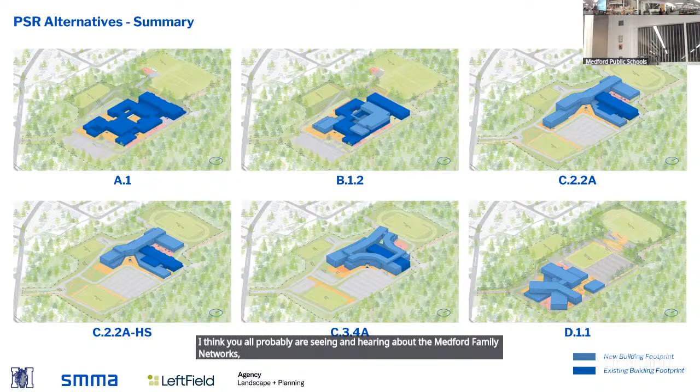I think you all probably are seeing and hearing about the Medford Family Network's loss of a grant and the way that throws that program into question. Nobody in Medford wants to see the Medford Family Network go away. It provides critical resources, and more importantly, it has huge potential to continue to provide services a little different than they are today, to reach more families here in Medford as Medford's families change over time. So all of those things have always been part of the plan, and really the cost is causing us to say, is it the best plan? So stepping back and evaluating whether this is the best plan or there's another better plan is what will happen as we go forward.

Can I just say one small thing too about Kids Corner? It's our municipal daycare. It serves our teachers, it serves anyone that works within the city of Medford. It does also serve some community families for space when there's open enrollment, and it also serves our students. So if we have students that require daycare so they can finish their high school education and graduate, we also provide that here. One of the things is it's a very tight space right now, and there are wait lists, especially from community members. So this would also offer an opportunity to enlarge that daycare opportunity within the city for a lot of our families.

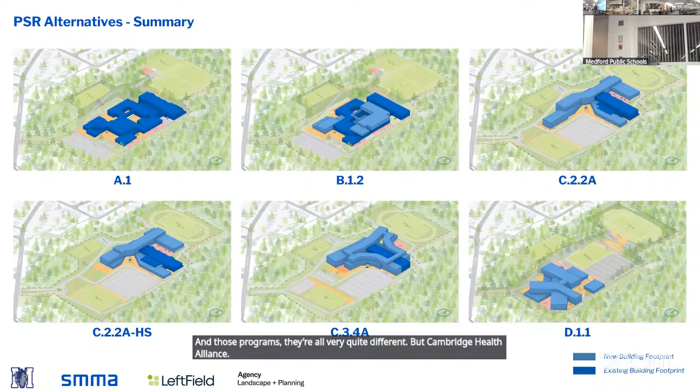Those programs are all quite different, but Cambridge Health Alliance would operate sort of independently of our school, but also within our school. There's a lot of grant funding that comes with those programs to open teen health centers in high schools.

So that was the genesis again to explore, which was to say we can never do that if there is no space for it, but if there is space, could we create a collaborative partnership with a reputable provider in the community and provide access to care for our students here in this building?

Beyond what Dr. Sabia is able to do in the limited time he has to come here, to really have standing healthcare, like Malden High does have a teen health center, and there are several big schools that provide that. So that was the genesis of saying we should look at this and decide if it's something we want to go forward with. But the first thing is there has to be space for that.

And full transparency, the grant requires that. So the grant funding that Jenny mentioned requires separate space, not a shared space.

And then the last piece is additional fields. Is this for the fields above? Yeah, yes.

I'm just going to be honest, not swaying anyone, but I am one of those people that would love to see if ever we could do the track and football fields here. I say that for a couple of reasons, purely around equity.

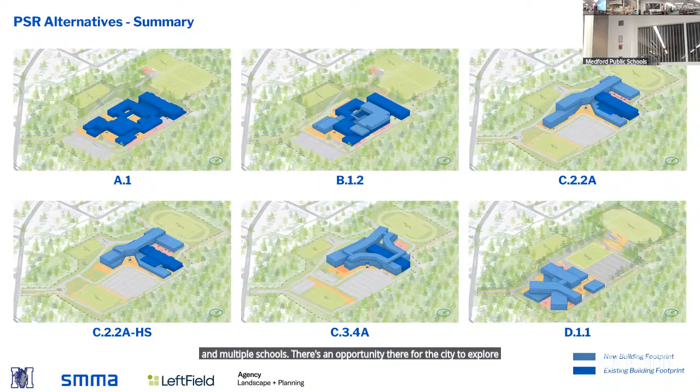The other thing this could do for Medford is allow us to activate Hormel differently than it is today. Hormel is situated near affordable grocery stores, public transit, and multiple schools. There's an opportunity there for the city to explore, if they choose, to ask what Hormel could be if we co-locate our main stadium here.

So there's a bigger planning and development vision there. I've been talking about that with folks on the council and the mayor for well over a year now. It first came up when the horse farm, which sits adjacent here, went up for sale, and I thought we should buy that for this project. It got scooped up, and now it's going to become 12 houses. But those kinds of opportunities to acquire space and do the things we're trying to do in Medford, and to activate spaces differently, are tangential opportunities that only become possible if we can relocate that.

Hormel also needs a tremendous amount of work on its own, as its own project. So the question becomes: is there an opportunity to really zoom out and think about what's possible? That's where field over parking came from, along with the planning. There's an equity piece, an activation of Hormel piece, and an additional inventory opportunity.

I was trying to ask something.

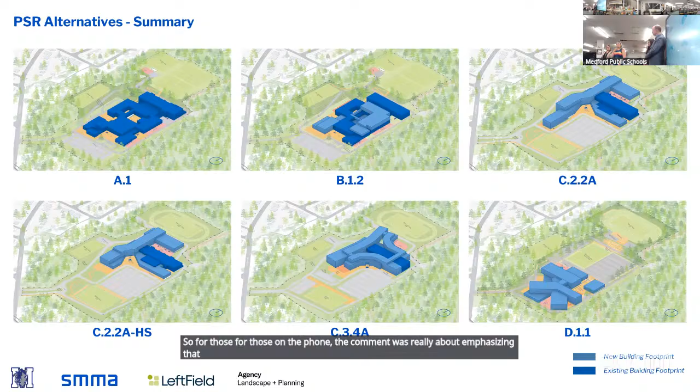So for those on the phone, the comment was really about emphasizing that our constraints extend to our indoor basketball facilities and our pool, and the increasing importance that the Medford High School campus plays, particularly in basketball and as the only location of an indoor pool in the city.

Yes, just a real quick question about fields, since we're on topic, for the 80 months or so - I really think a lot will be used as part of construction. Where else is available for that time frame?

That's a great question, and it's one we don't have an answer to yet. But there's a lot of conversation already happening about what those possibilities are. I've talked to folks at Tufts, like, hey, we might need some help over here. Hormel is one of those concerns. If we have to relocate programming to Hormel, I think Hormel needs substantial work before it can really house that kind of activity. So all of that contingency planning has yet to come.

The goal has to be that I won't get kicked out of my house and have the locks changed if there's not a soccer field for Lucas to play on. Lucas is like, just don't take my soccer field. Some of the theater kids would say the same thing, just leave my theater alone. It's real - what draws you here might be your robotics lab, the theater, or the gymnastics room. It could be anything, but kids have to belong here, whether it's under construction or not. We'll work through all of that to make sure there are plans for all of those programs.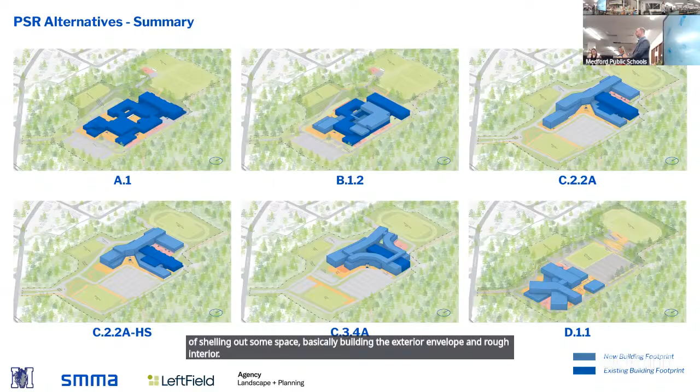The question online is, have we considered in C 2.2A or somewhere in between C.2.2A and the high school only option, shelling out some space - basically building the exterior envelope and rough interior structural systems, and coming back later to finish out the inside in any number of ways. That's a great example of how these options can evolve as we go forward. We haven't looked at that specific scenario, but it's something we could look at. There's probably still going to be a significant amount of cost for structural foundations and the exterior envelope - whether it's 75/25, I don't know exactly, but it's probably not a 50-50 split in terms of investment. It would allow for additional discussion down the road about what would go in there programmatically. So there may be some value in it, and it's certainly something we could talk about in the coming months.

Any other questions online, Will? No.